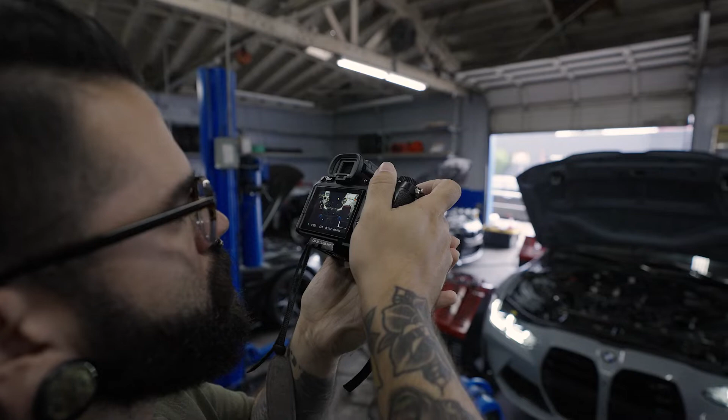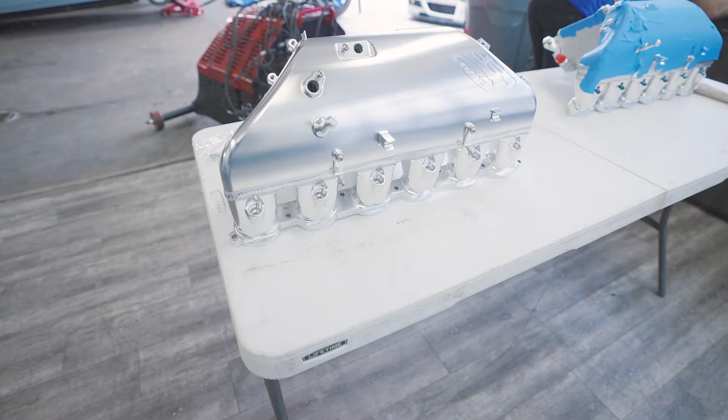It's October 13th, 2022. Today's a really exciting day. I'm here at GTP Motorsports in North Hollywood, California. I'm here with Moto IQ. We have Yurbal, the owner of GTP Motorsports, and his G82 M4.

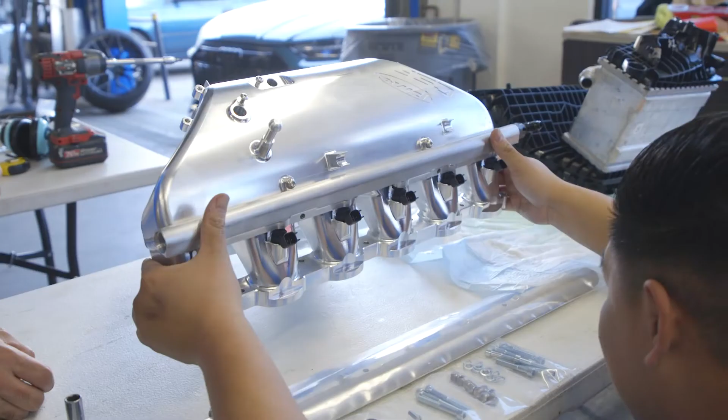We're gonna be testing our new Level Up S58 intake manifold with built-in charge cooler that we've made with our strategic manufacturing partners, PWR. It's 70 degrees outside, it's perfect boost weather. I'm really excited to see your impressions on the part. It's the first time you've seen it, and get it in a car and see what it does.

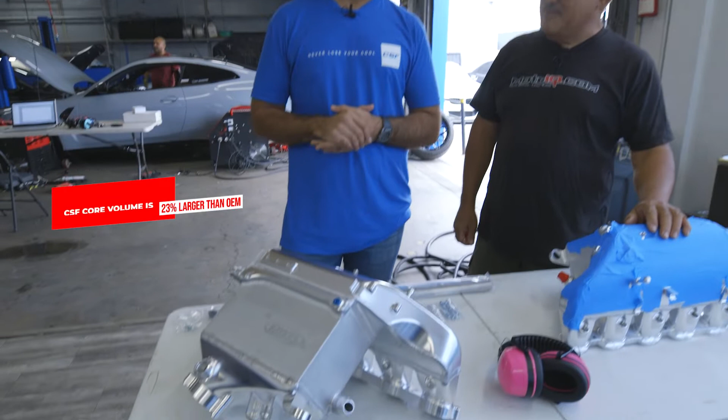The stock manifold's really hard to beat. The Supra had a really small intercooler, and it was really easy for you to package a lot better of an intercooler in there. But this car has a huge intercooler stock. The plastic, I think, is kind of weak, and this should be a big improvement. The core itself is about 23% bigger than the original. So we're using a super ultra efficient bar and plate core versus the OEM that has a tube and fin core.

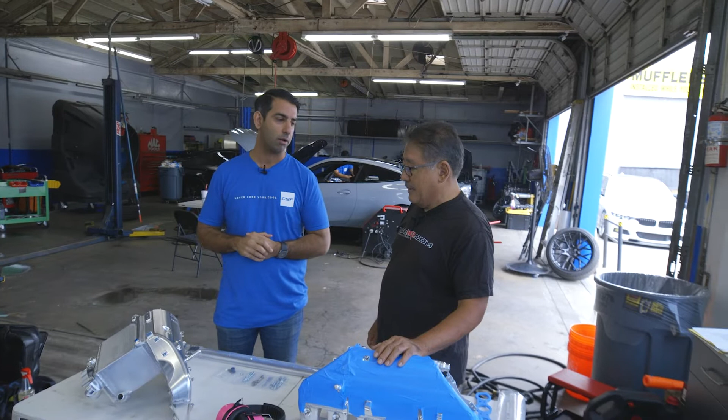The stock boost level on this car is about 15 PSI. Because of EcuTech and other tuning platforms and what people were able to develop with the S58 platform, guys are already pushing 26 PSI, 30 PSI. Right now he's running between 32 and 38 PSI. We're already talking about almost three times the boost levels with this car already. It's been my experience, stock plastic manifolds blow up.

Where does the stock manifold become a problem where you might blow it up? Well, yours is definitely going to hold together better. From all the feedback that we've gotten through the community and talking to Yurbal here today, anywhere past 30, 32 PSI, you're risking the stock manifold basically separating where the core is crimped on to the plastic tank. That's a typical failure mode. So with ours being 100% TIG welded, CNC billet aluminum, this should be good for 60 PSI plus.

This is really kind of future proof for where the market's going to go. Just in the few short years that the S58 motor's been out, guys at the drag strip are already pushing past that 50 PSI mark. So this thing's ready to go for those levels as well. The engine's direct injection, but you have provisions for port injection here for taking it to the next level where the stock fuel system can't manage anymore, right?

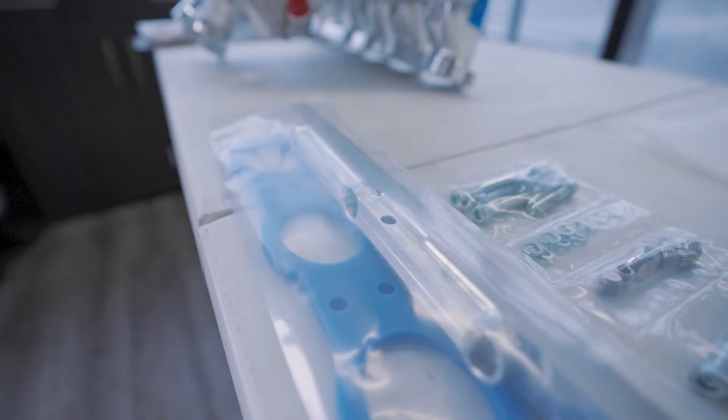Yeah, absolutely. So, talking to Yurbal today and getting a little bit more feedback on what his customers are requesting, the stock car being at 15 PSI, he said guys really start doing secondary port injection at about 26 PSI. It's all built in, ready for that. It comes with everything you need, the fuel rail, all the bolts. You just have to have your own injectors, and we definitely recommend several different brands that work well with this kit. So it's good to go for all the fuel.

Today we're going to be running it at 26 PSI with no secondary port injection, just so we can compare the stock manifold versus the performance of the CSF. Then we're going to be running 32 PSI with port injection, 38 PSI with port injection, and at that point we're pretty much tapped out at any limitation of the OEM manifold. And then we're going to give it hell and try to do as much as we possibly can, 40, 45 PSI with the CSF, and really see the performance gains and all the advantages that he wasn't able to get with the OEM manifold.

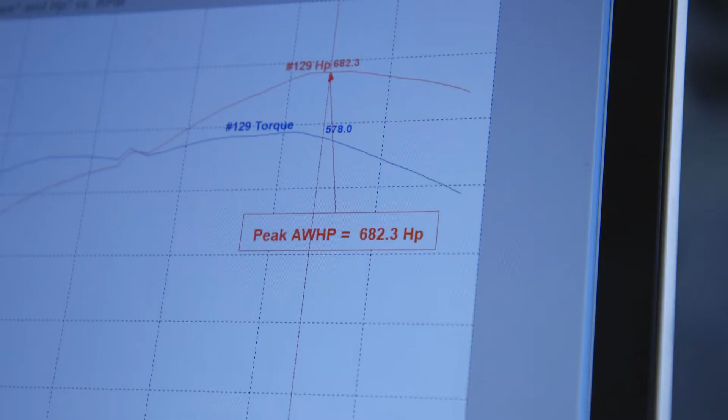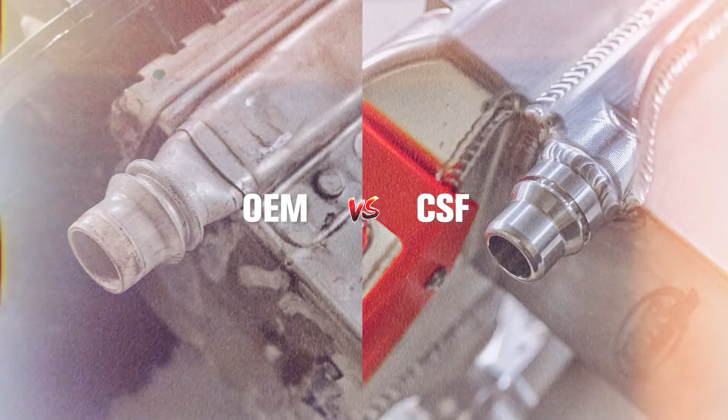Does your plenum have more volume? Not only does it have more volume, with some of the pictures that we're going to roll into the video, you're actually going to see all of the air guides that we've machined on the interior side of the plenum. We've done a really good job with CFD analysis, working with our partners at CSF to really maximize the efficiency and the flow, and make sure everything was optimized for the performance and airflow of the manifold. CFD is a really powerful tool, and it's kind of a step up on what the typical aftermarket does. That gives you a lot more confidence that this is actually going to perform.

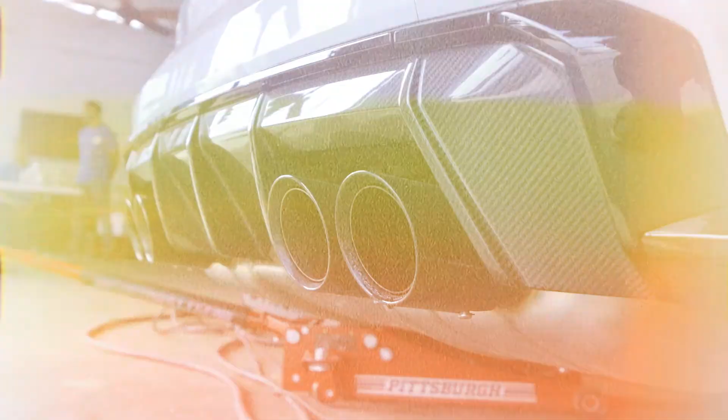The way we've machined the ID of our quick connect fittings to be higher flow, it's a really good full package to get the performance that we're looking for. So I'm really excited to see how it does.

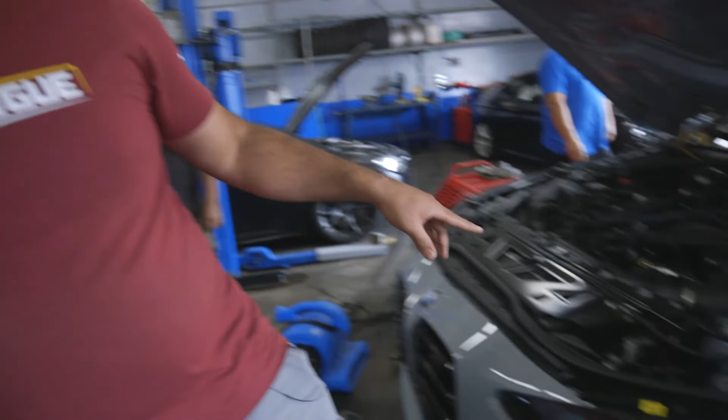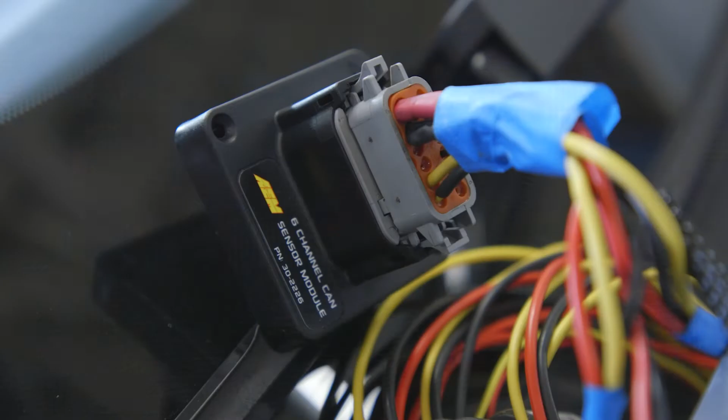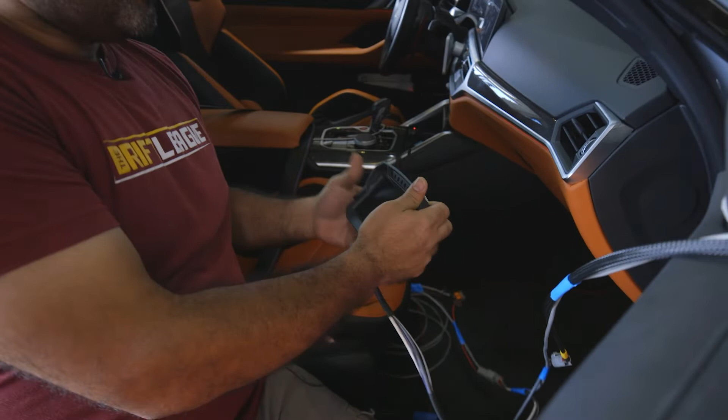So inlet and outlet pressures are being monitored by the EcuTek, and our inlet pressure is also being logged by the EcuTek, but there's no way to really log that separately. So what we're doing, you're using an AEM data logger. So we have our AEM pressure sensor here, and we follow the wiring. That's going to take us over to the AEM 6-channel CAN bus module. What this does is take a CAN signal and interpret it into a signal that the CD7 dash will be able to read. We also have our cigarette lighter adapter here.

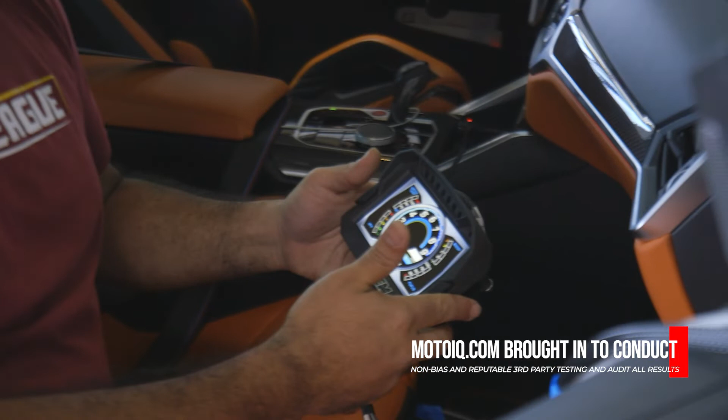This AEM dash we're actually using as kind of like our mobile test system, so whenever we have to test anything, depending on the sensors, we can go ahead and make the changes here. So we'll show you the menus here. So we have our inlet and outlet pressures that we're going to be monitoring here with the dash, but again, we're only doing the outlet pressures for today.

So now, hey, we're back. It's 12:30, 74 degrees, North Hollywood. We're about to get started with the first test.

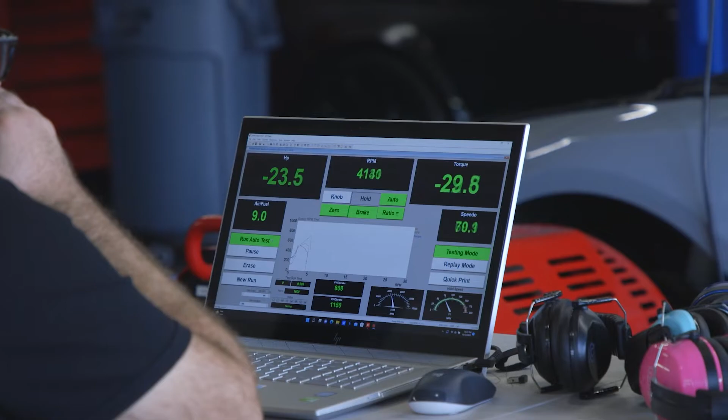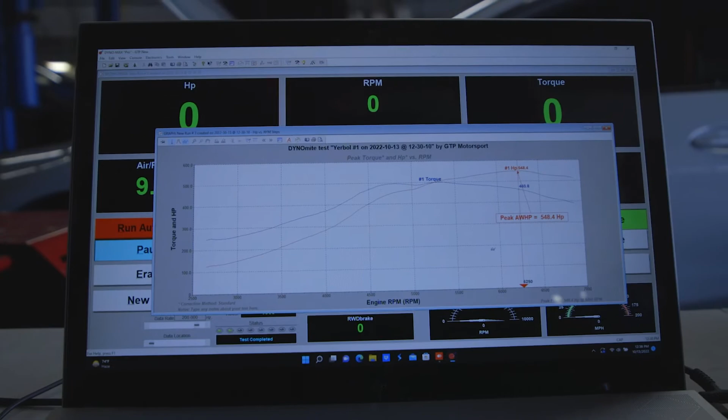So basically we just did the first run. We targeted 25 PSI, sometimes it goes a little over. He made about 548 horsepower at that. We saw that he lost 2 pounds of pressure through the manifold. So that's the pressure loss as it goes through the intake manifold.

So yeah, right now we're just logging everything. We're gonna do 2 more runs. So for every power level, we're gonna do 3. We're gonna take an average. We're really gonna get the right data so we can present that to everybody about how our intake manifold works once we swap it out.

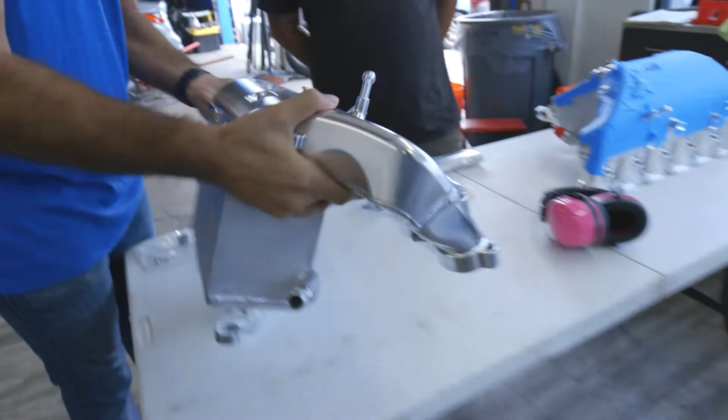What I really liked about your Supra manifold was all the attention to detail. You know, like how some of the other manifolds, you'd have to take the manifold off to change the oil filter, and you made sure there was plenty of room to work around things. So I assume that you did all your homework and you put a lot of attention to detail in this manifold too. Absolutely, and you know, you just mentioned about that recess for the oil filter.

It's sitting right here. As this thing sits in the car, we'll be able to get our hand right under, get the oil filter. And you know, a lot of the professional guys, Pro-Am guys who are racing, they really appreciate that because they're changing their oil every time they go to the track. This manifold is a lot more complicated and a little bit harder to install compared to the B58 that sits on top of the engine.

The fact that other guys are trying to come out with this and you can't get to the oil filter is a really bad idea and it's a bad design. It's a pain to take this out, and then every time you take it out, you're gonna end up scratching it. So, you know, you don't wanna scratch your nice pretty manifold either. And so like every boss, every fitting, everything to work is right in there, typical of like all your products.

We really wanted to give it that OEM fit and finish. So we thought about everything from a machine pin that works if you want to run the engine cover to these evap hose line brackets, so the wire sits there, it's not flapping around or moving. Some of this stuff you'll never see when it's installed, but we really want to go that extra, extra mile to give the product all the value that it deserves.

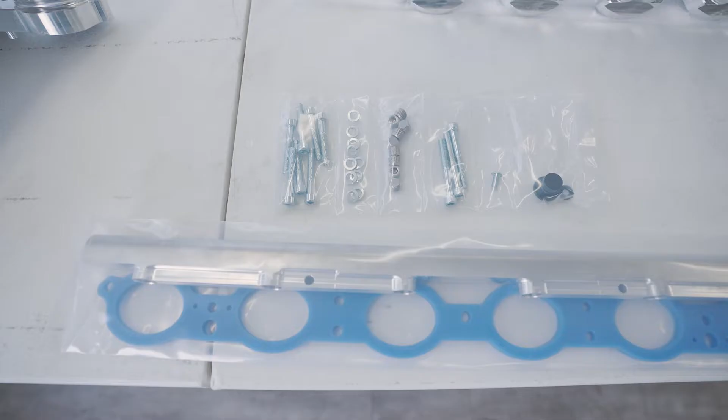Every single one of your products that I've ever used, from the radiator to whatever, drops right in and has a lot of attention to those little details. You know, we even try to go as far as how it's come packaged. Just like what we did from the Supra, everything comes vacuum bagged, everything's gonna have a letter, it's gonna have all those same similar types of instructions that have diagrams of where everything needs to go. It'll be step-by-step instructions for a DIY guy or any shop who's doing this for the first time. It should be like, no questions asked, how do you install this complicated part as easy as possible?

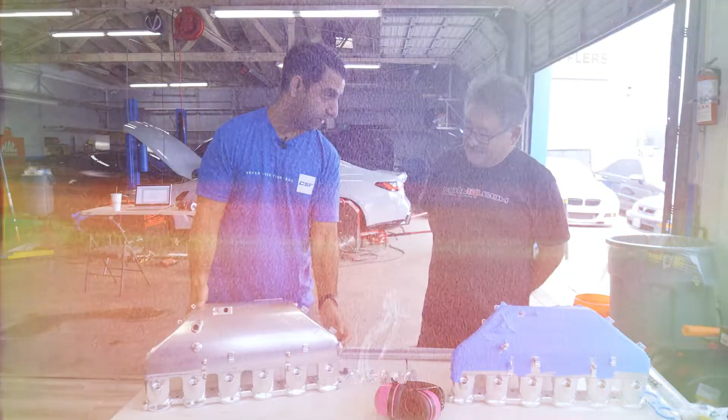We've done the same thing that we did on our B58 manifold. We've included this parameter pad on the outlet side, the cold side of the manifold, with 3 1/8 NPTs. You can read boost references, you can use it to sensor anything that you would like. Another thing that we have is this threaded ORB fitting right here, and there's also another one on this side on the throttle bodies. Not just the M3 and M4, it also fits the F87, X3M, and X4M, and their crankcase position is different. So we've actually included threaded machine fittings that we've made.

What you can also do is, if you want, you can use the hose on certain applications and use this as another boost reference. You know, you can run a blow-off valve off this or some other type of reference point with the hose that we supply.

Another thing that's pretty cool that we've added on the water side, even though this system is technically self-bleeding, we've actually added a bleeder port. A lot of guys don't know how to run the factory BMW bleeding procedure. Sometimes you have to run it multiple times to really get all the air out. Just having this available, with being able to get in with an Allen key and really make sure the rest of the air is out, I think is another nice, neat touch that we added.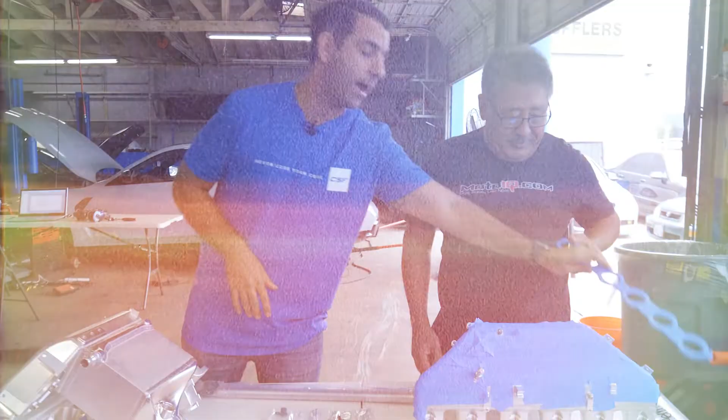I see you have a heat isolating gasket too. Absolutely, so if you hand one, I have one out of the plastic bag. So this is something that we've come out with for the B58 manifold as well. It's a thermal rejection spacer. And what you're doing is you're basically separating the metal from the throttle body on the cylinder flange versus the cylinder head.

And you're not getting that heat transfer. So this actually now comes standard with this manifold. We designed it to include it, and it comes in the kit. We actually went to an aerospace grade company called KTN Thermodynamics, and it's made out of a proprietary patented material called Kyle-X. The testing that we saw with our B58 manifold, we were getting about 40 to 60 degree intake air temp drops with this installed.

This is a huge benefit that we're including with our kit. Don't be fooled by, you know, same color or same design. This is definitely a very technical part that we've worked with some very great people on.

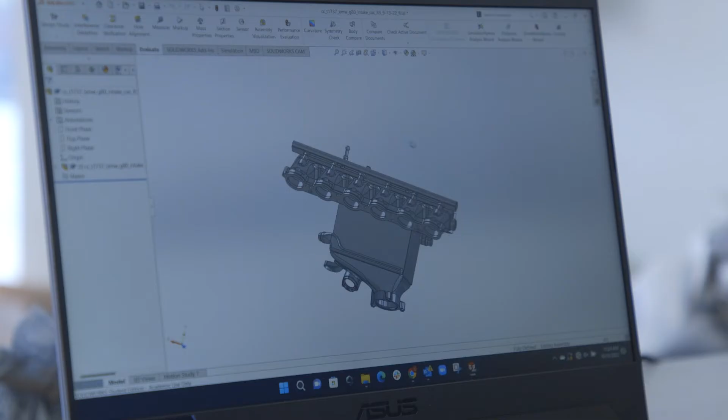Here with Raphael, he's our new engineering assistant. So Ralph has been really instrumental in working with PWR to make sure that we can get the CAD files designed, revisions done efficiently. So check out what we've been doing.

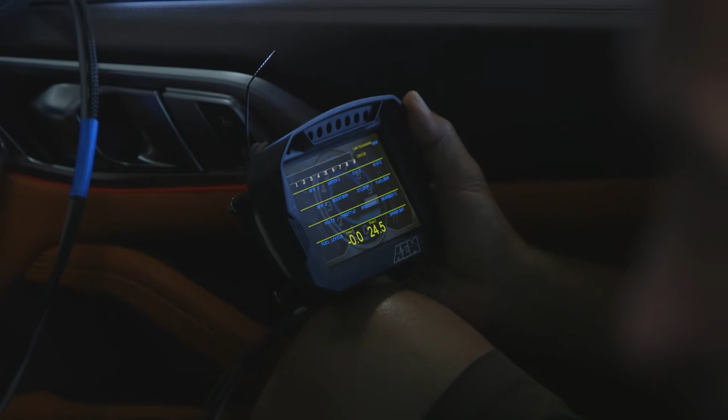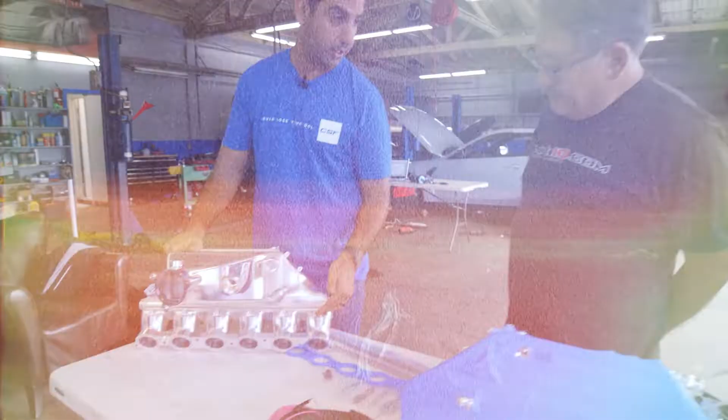So that was our official first test. We're targeting 25 PSI, 593 horsepower, 490.8 torque. That's 25 PSI with increased timing, no port injection. It's about 12:45 in the afternoon, 75 degrees outside. So we're gonna do that test a couple times, get an average reading. Then we're gonna do a heat soak test, and then we're gonna increase the boost. 12 runs for the OEM, then we're gonna swap to the CSF, and then do all those tests again.

These are 1/8 NPTs. We're just thinking about the future, what guys are gonna be wanting to do later down the line. So on the back side of this manifold, you can do individual meth or nitrous control. They come plugged, and they're just there, so if a guy wants to run nitrous, he can run that as well.

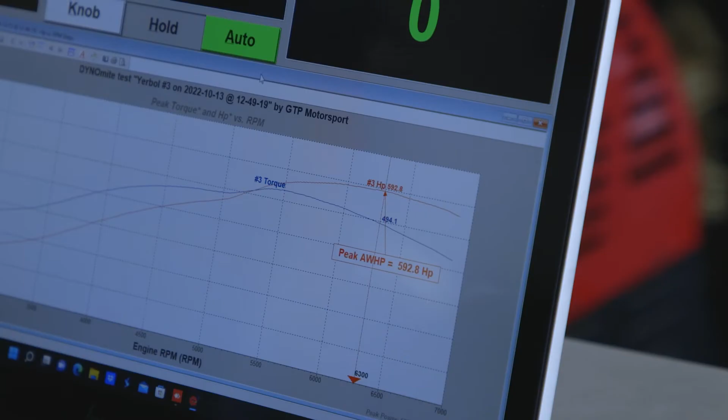We just finished the first 3 tests at 25 PSI, no port injection. And to be honest and completely transparent, the stock intake manifold is actually working really well. Only about a 9 degree Fahrenheit difference in intake air temps. And we're gonna raise the boost now to 32 PSI.

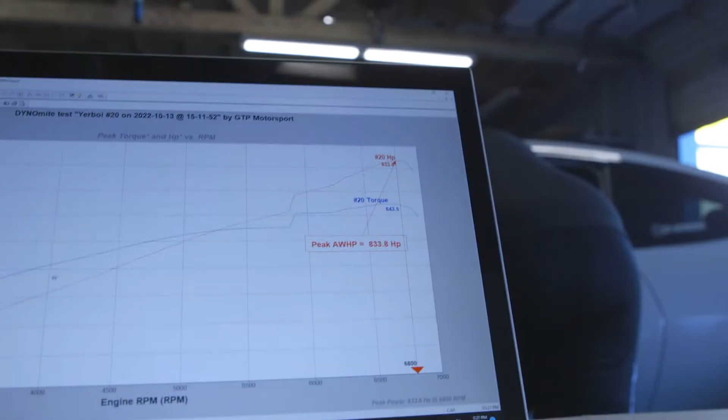About 3:30 right now. I'm here with Yerbol, owner of GTP Motorsports. He was the one doing the dyno testing. Actually pleasantly surprised to see how well the stock manifold does perform. A lot of guys are starting to have it fail at around 30, 32 PSI and a little bit more. You were able to do a glory run all the way up to about 40 PSI, but it does look like it lost a lot of boost pressure at the very top.

Yeah, it looks like in the intake manifold, after 6,000 RPM, it's losing a lot of boost. Maybe it's squeezing somewhere. We will inspect it later, see what's going on. But it's not run to run, it's not constant. One run it's keeping the boost, next run it's just losing. We don't know, so we will check it. Some issues with the stock manifold, but you were making about 840 horsepower. Yeah, rounded numbers. On his dyno, so good numbers.

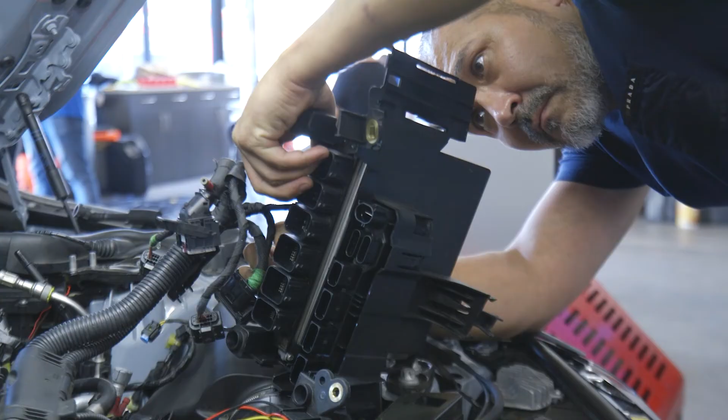And now we're gonna put ours on there, the CSF manifold, and see how it does. We're definitely gonna be doing all the same testing that you just saw, and then we're gonna see if we can start passing 40 PSI. So really, this is a product for guys who want the reliability, want to do super high horsepower, and we're gonna see what it can do.

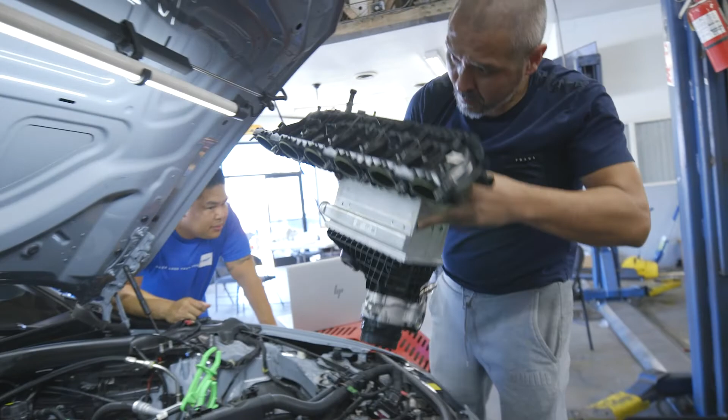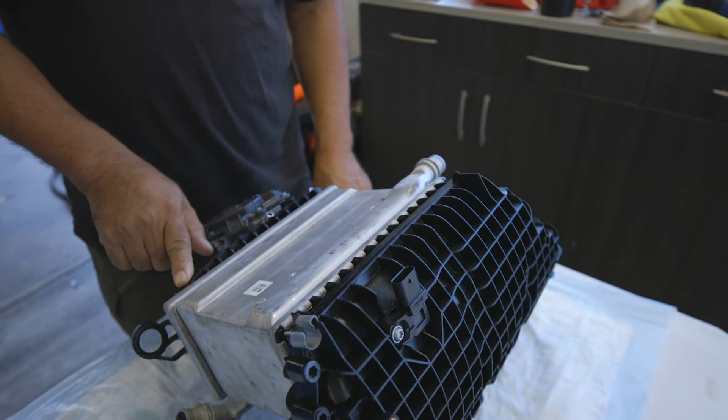We just pulled off the stock manifold. We have it side by side with the CSF by PWR manifold. The stock manifold did pretty well. The car made almost 840 horsepower on this dyno. I'm really excited to see now what this is gonna do, knowing how much more efficient this core is compared to this one. Super obvious that that core is bigger. You can see there's more plenum volume through here. These are the crimps that fail, right?

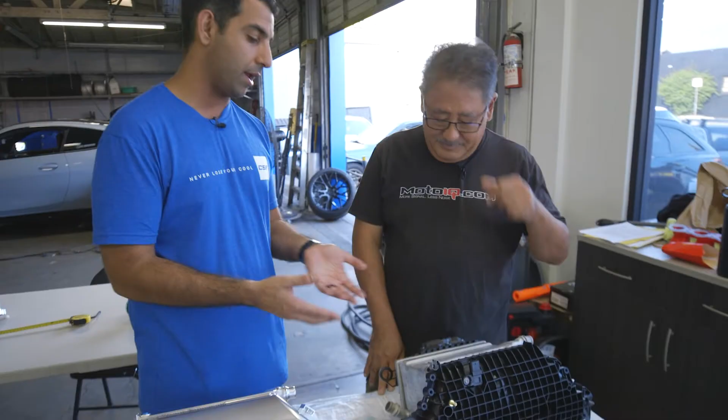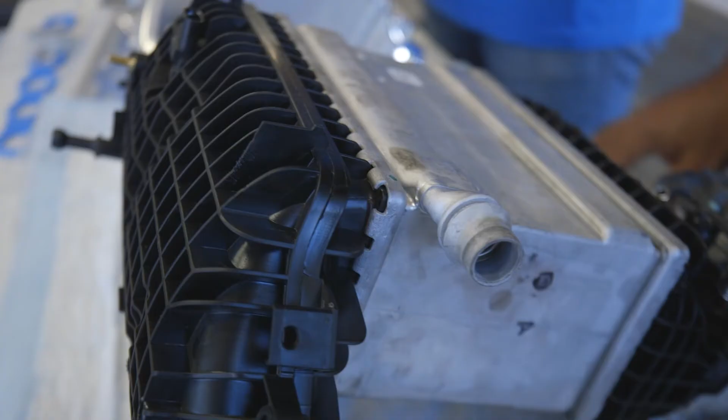Yeah, and at about 40 PSI, we were getting really irregular boost. Sometimes it would be fine, sometimes it would lose a ton of pressure at the top end. So there's obviously air and boost pressure coming out from somewhere. Since it's irregular, you don't know if the seal's popping, you don't know where it is, because intermittent problems are the hardest ones to chase. We're not worried about that with the CSF one. We're really excited to see what it's about to do. With these plastic end tanks, for a system that's designed to be 15 PSI, you start to get to 40, it's not really designed to do that.

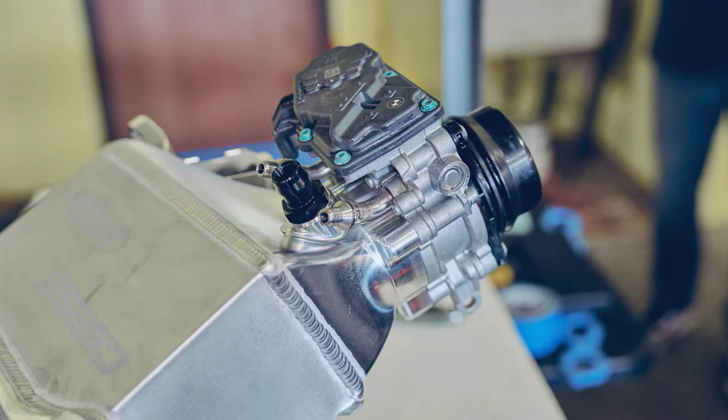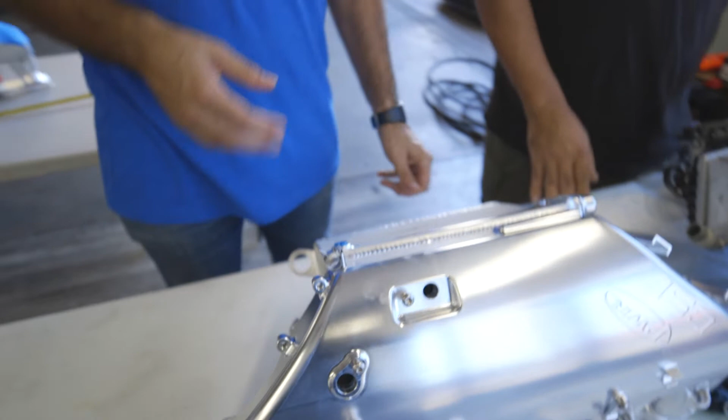It's just like the radiator where there's an O-ring in there, and then this whole thing blows out. You know, the provisions on ours are all there. Even this clip that sits right here, once we pop it off, is going to fit right onto this. So even for all the brackets and wires, we have all the clips and rotations and everything like that. So we've really thought of everything for this part.

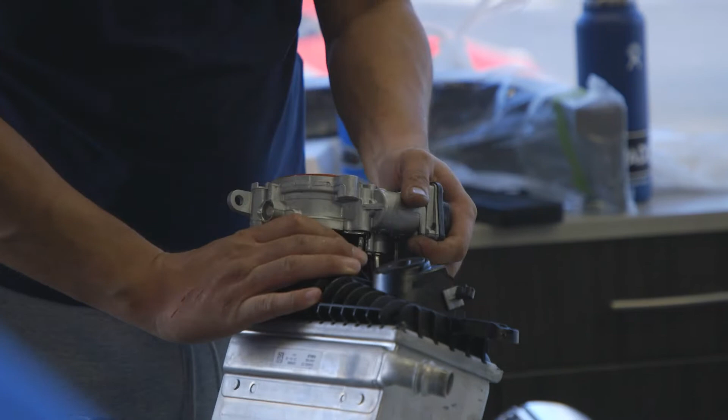We're going to plug the rest of the ports that we need. We're going to put the port injection on here. We're going to put all the provisions that needed to be run on this car, and we're going to get this in. Yeah. Sorry, where's the stock?

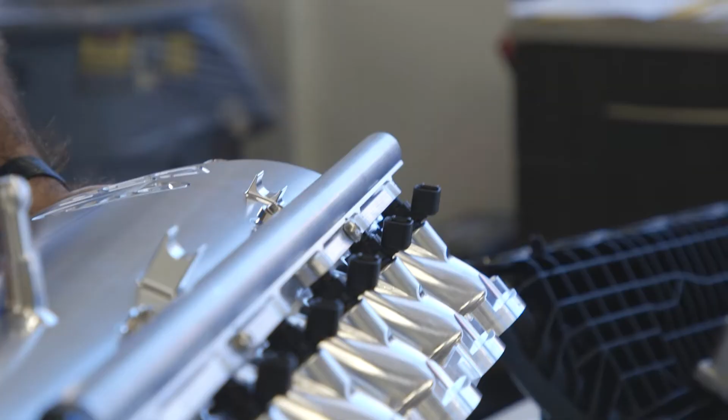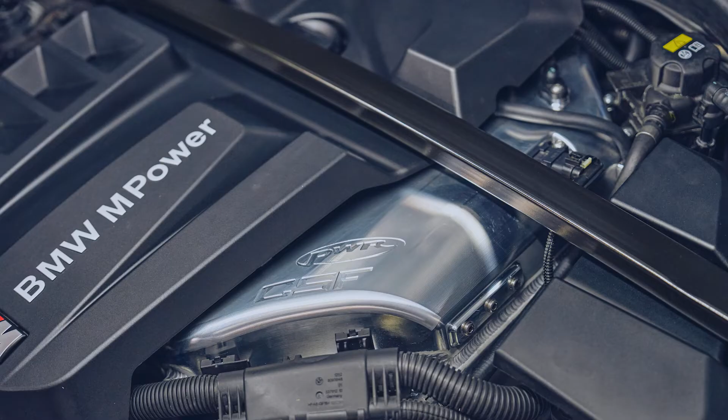So we just installed the CSF by PWR manifold. Everything went in just like it's supposed to. Engine cover's back on. That's even installed with the fuel rail. So you can run port injection and continue to run your engine cover, which is exclusive to our design. Right now, Yorbol is just filling up the coolant. We're gonna run factory bleeding procedure once or twice just to make sure that all the air is out. And we're gonna start the testing.

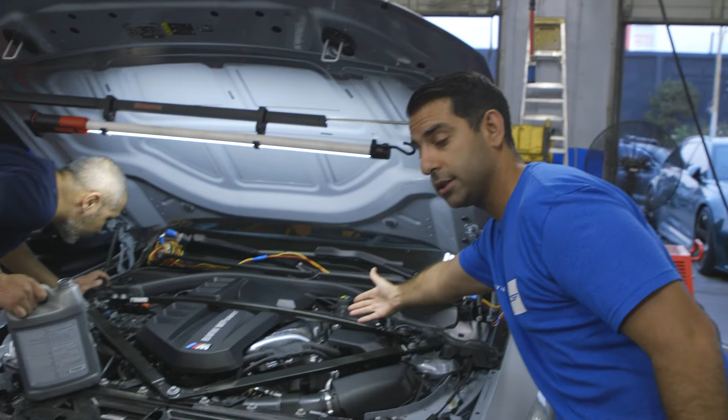We're gonna do the same testing just to kind of compare pressure loss across the core. We were getting about 1.5 to 2 pounds on the stock manifold. We wanna see what the new bar and plate core is getting. And at that point, we're gonna do one run each at 25 pounds without port injection, 32, then we're gonna go up to 40. And at that point, we're gonna start building on that. So where we stopped with the stock manifold, we're gonna continue to move forward with the CSF. So that's where we're at right now.

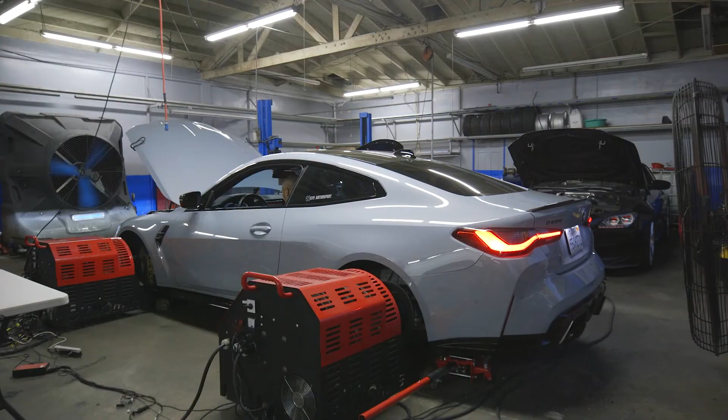As you can see with it installed, yeah, it looks great. You're gonna get all the boost and all the looks. Because the OEM manifold actually held up and did pretty well, why don't we just start the CSF manifold testing at where we left off. So we're gonna start back at 40 PSI, and then we're gonna build from there. We'll do 40, 42, 44, and move forward. And let's see how much more boost pressure this can hold than the stock manifold.

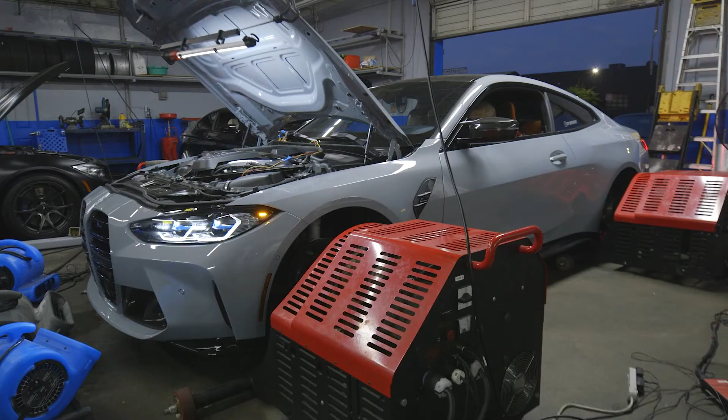831 horsepower, so that's only at 40 pounds of boost. So yeah, we're already going higher horsepower than we were earlier. That just looked easy. So we're gonna start going up from here.

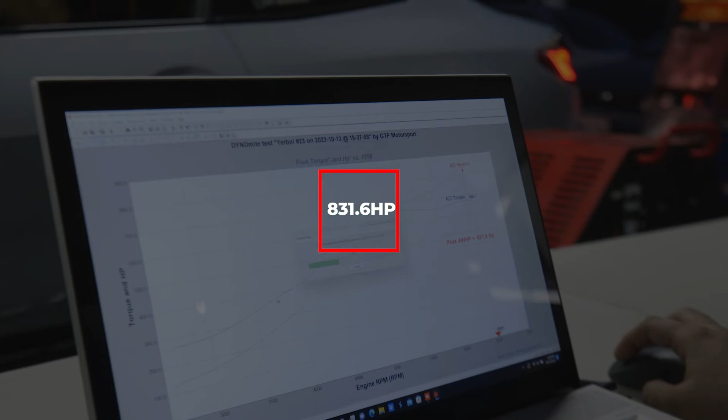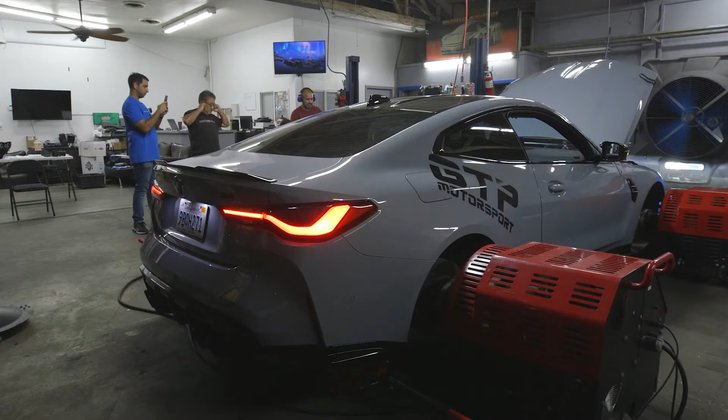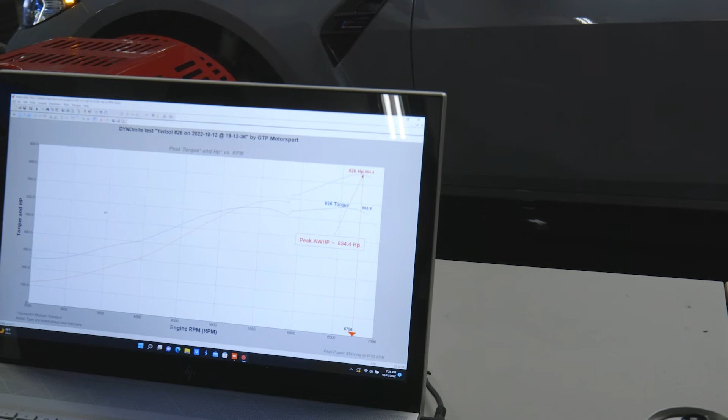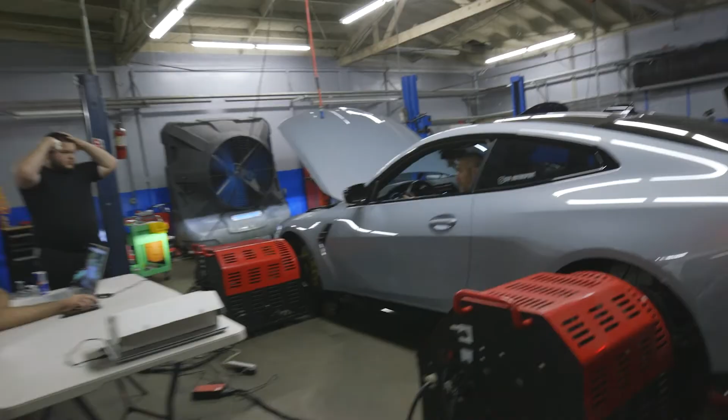Right now we're gonna do a heat soak test. We're basically gonna do a bunch of 20 to 130 pulls. So we're gonna do 10 of them. 40 pounds of boost. He's gonna rip it up to 130. He's gonna let it naturally come back down to 20. He's gonna rip it again. And we're gonna do that 10 times. And we're gonna be measuring starting and ending intake air temps, just to show you guys how good the recovery of the intercooler manifold is.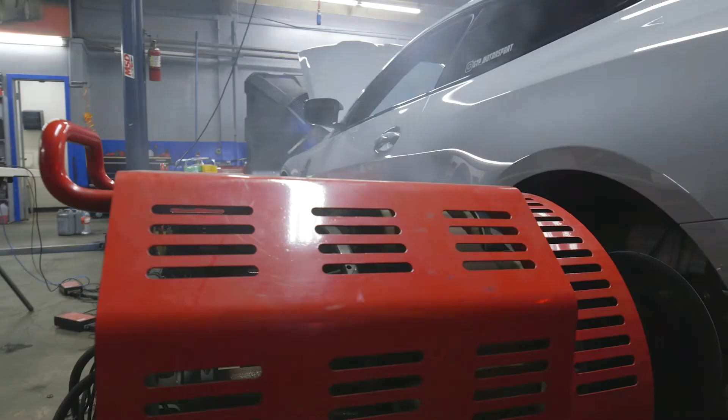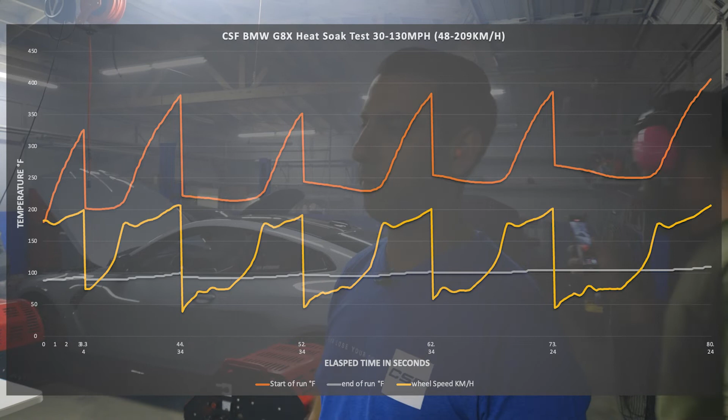So we just finished our heat soak recovery test, and we just got through 6 runs, fried the brakes. Engine cooling was super high temps, and drivetrain limp mode is what we got. But intake air temps were super consistent throughout every test. It went from 40 to 43 Celsius. So basically you're going from 104 to 110 degrees Fahrenheit intake air temps, and it didn't move, it was pegged the entire time. So the cooler is definitely working.

You're not getting this rising intake air temperature as you do repeated runs. The recovery is really good. It's coming right back down to where it started, and that's the type of performance we're looking for. You're gonna get repeatable, measurable performance with the CSF intercooler. So that kind of concludes where we're at today.

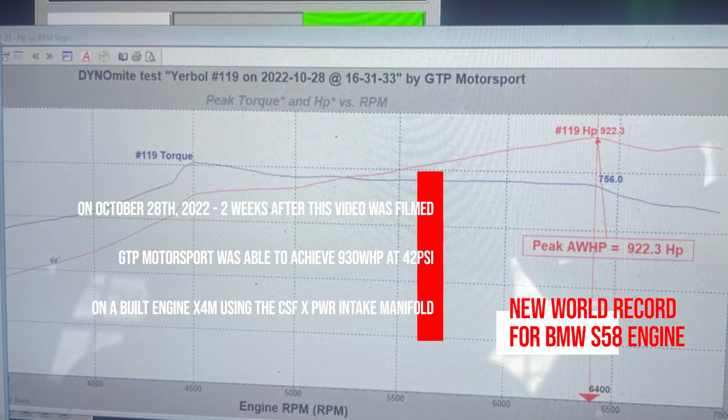I wish we had a bigger turbo on the car so we could really start to max out where it's going, but guys with xDrive, guys doing upgraded turbos, guys who are going to be pushing 45 to 50 plus PSI, this is the part you need. We've seen it throughout the industry. Guys are doing 32 PSI on their stock manifolds, they're blowing. Somehow we were able to get to 38, 40 PSI on a stock manifold, but that's not common.

So if you're a guy who wants to do big boost, you want the durability and reliability from your manifold, you're gonna need to get the CSF by PWR. It is now available.